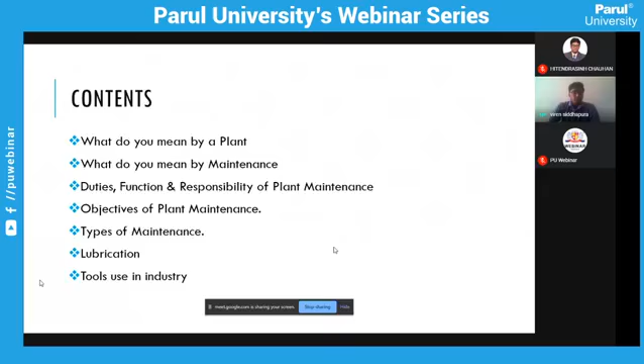So now we are going. What do you mean by plant? Plant is a place where men, material, money, equipment, machinery, etc. are brought together for manufacturing products.

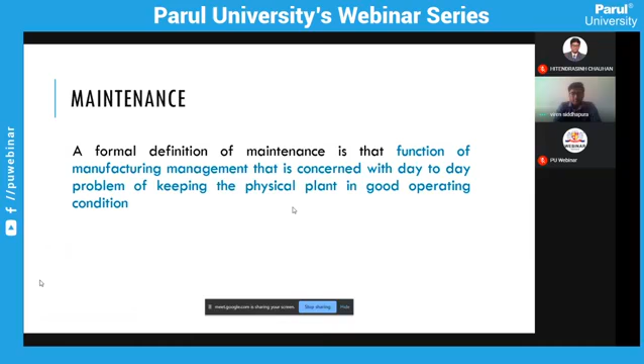Maintenance engineer works over time. The second topic is what is the duty, function, and responsibility of the plant maintenance department. First is inspection, inspection of every equipment.

Inspection of every equipment used in plant maintenance is required to maintain that equipment and engineering data regarding drawings of pumps, equipment, fans, blowers, and so on.

For example, we should require to overhaul that pump, so we should require to get parts of the pump to replace. This is called overhauling or gearbox overhaul of every equipment.

Then after housekeeping, after completion of any job, we will require to housekeep the surrounding area. And the last one is supervision of labor force, which is required to manage the labor forces as per our work environment.

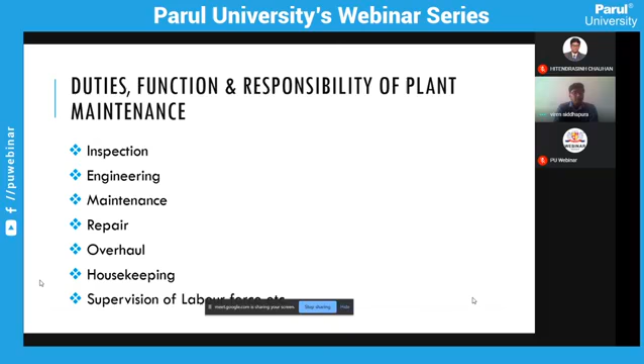So the third topic is the objective of plant maintenance: to achieve minimum breakdown and keep the plant in good working condition at the lowest possible cost. Our main objective is to minimize breakdown to achieve the lowest possible cost. If we achieve minimum breakdown, then by default we'll achieve a lower possible cost.

Second, machines and other facilities should be kept in such conditions which permit them to be used at optimum making capacity without any interruption.

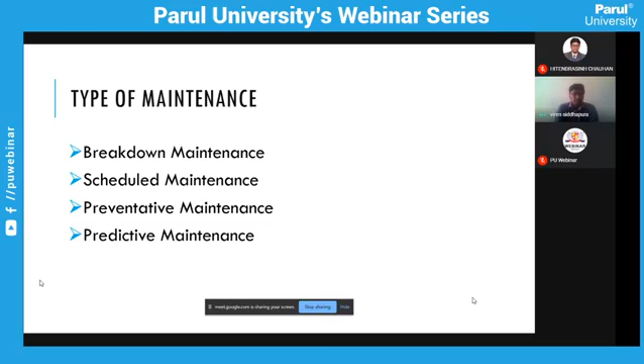Second is, what type of maintenance? There are four types of maintenance: breakdown maintenance, scheduled maintenance, preventive maintenance, and predictive maintenance. The first one is breakdown maintenance. Corrective or breakdown maintenance implies that repairs are made after the equipment is out of order and it cannot be performed in normal conditions.

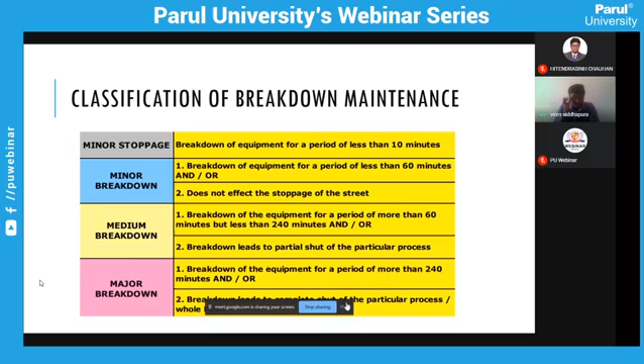Typical cause of the breakdown: failure to replace worn-out parts, lack of proper maintenance, external factors, and sudden changing process parameters. This condition also requires replacement of worn-out parts. और किसी वजह से कोई हमने मेंटेनेंस किया लास्ट टाइम और वो प्रॉपर नहीं हुआ है उसकी वजह से ब्रेकडाउन आ सकता है. सडन चेंजिंग प्रोसेस पैरामीटर - अगर कोई केमिकल प्लांट है और उसमें कोई प्रोसेस पैरामीटर को सडनली चेंज किया जाता है ग्रेजुअल चेंज करने के सिवाय तो इसकी वजह से भी ब्रेकडाउन आ सकता है.

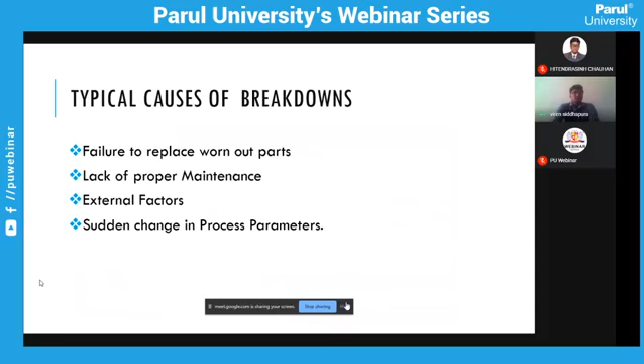Disadvantage of the breakdown maintenance: breakdown generally occurs at improper time. This leads to poor hurry maintenance and excessive delay in production. Second is faster plant deterioration, direct loss of profit and reduction in output. तो जब भी ब्रेकडाउन होता है तो ऑब्वियसली कंपनी में कुछ प्रोडक्शन लॉसेस होते हैं, उसकी वजह से हमें काफी डिसएडवांटेज है हमारे लिए।

Scheduled maintenance is a switch-in-time procedure aimed at avoiding the breakdown, which should be minimized. The scheduled inspections, repair, and overhauling is part.

For example, routine maintenance, running maintenance, opportunity maintenance, window maintenance, shutdown preventive maintenance. So preventive maintenance, routine preventive maintenance, which includes those maintenance activities that are repetitive and periodic in nature, such as cleaning or small adjustment of instrument.

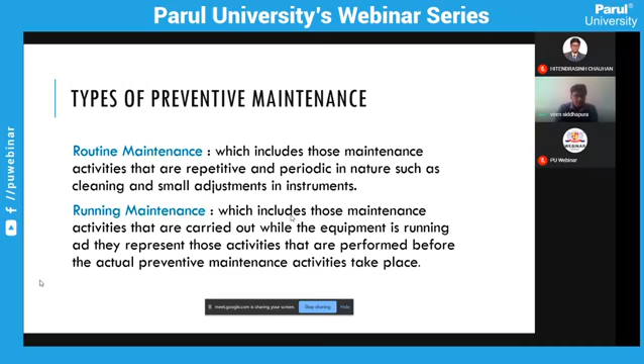Second is running maintenance, which represents those activities that are performed before the actual preventive maintenance actually takes place. Second is opportunity maintenance, which is a set of maintenance activities that are performed on instruments when an unplanned opportunity exists.

किसी भी इक्विपमेंट है, फॉर एग्जाम्पल कोई भी इक्विपमेंट है, उसे हम प्रिवेंटिव मेंटेनेंस में नहीं ले सकते और हमें किसी भी टाइम अपॉर्चुनिटी मिली मेंटेनेंस के लिए तो उसे ले लेते हैं, तो कहते हैं अपॉर्चुनिटी बेस्ड मेंटेनेंस। थर्ड वन इज विंडो मेंटेनेंस, which is a set of maintenance activities that are carried out when equipment is not required for a defined period of time.

The fifth one, shutdown preventive maintenance, which is a set of maintenance activities that are carried out when the total production line is stopped. फॉर एग्जाम्पल हम किसी भी शटडाउन लेते हैं एनुअल या क्वार्टर, तो उस टाइम जितने भी इक्विपमेंट है उसको मेंटेनेंस करते हैं तब जब पूरा प्लांट क्लोज होता है।

Objective of preventive maintenance: to minimize the possibility of unanticipated production interruption or major breakdown by locating or uncovering any condition which may lead to it. Maintain the optimum productivity efficiency of plant equipment and machinery. To maintain the operational accuracy of plant equipment, to reduce the work content of maintenance jobs, and to achieve the maximum.

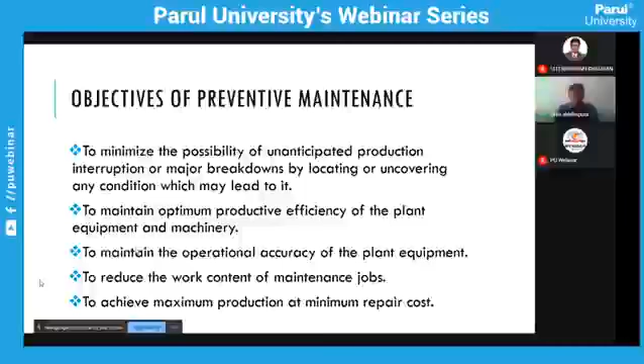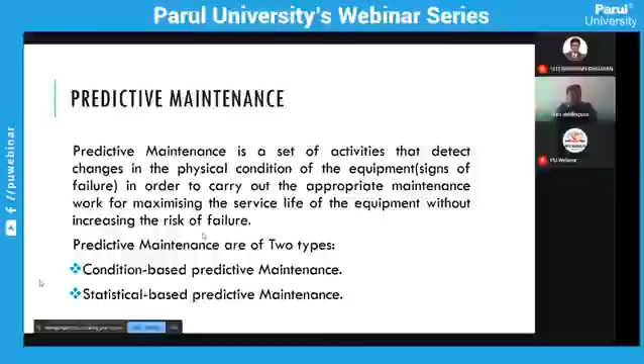and statistical based predictive maintenance. So the types of predictive maintenance are condition based and statistical based. The condition based depends on the continuous or periodical condition monitoring of equipment to detect a sign of failure. तो periodically हम इक्विपमेंट को मॉनिटर करते हैं और उसका साइन ऑफ फेलियर को आइडेंटिफाई करते हैं.

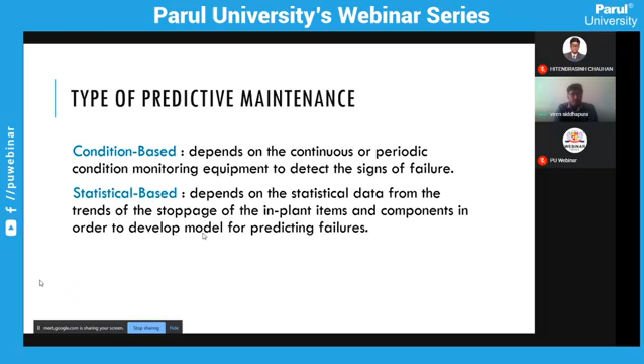Second, statistical based - depends on statistical data, meaning historical data, from the trend of the stoppage of plant items and components, in order to develop a model of predictive failure.

The drawback of predictive maintenance is that it depends heavily on information and correct interpretation of the information.

The main difference between preventive and predictive maintenance is that predictive maintenance uses the monitoring and conditioning of the equipment to predict the actual mean time to failure, whereas preventive maintenance is dependent upon the industrial average life statistics.

तो ये यहाँ पे मेंशन किया है कि प्रेडिक्टिव मेंटेनेंस को एज पर आवर नॉलेज विजडम हम मॉनिटरिंग करते हैं किसी भी इक्विपमेंट को, उसके हिसाब से हम डिसाइड करते हैं. और प्रिवेंटिव मेंटेनेंस को वो इंडस्ट्रियल एवरेज लाइफ स्टैटिस्टिक्स को डिसाइड किया जाता है.

तो बेसिक्स फॉर इवैल्यूएटिंग इक्विपमेंट परफॉर्मेंस. तो यहाँ पे कुछ नेम है. फॉर एग्जांपल मीन टाइम बिटवीन फेलियर MTBF तो इंडिकेट करता है रिलायबिलिटी ऑफ इक्विपमेंट. किसी भी इक्विपमेंट की रिलायबिलिटी क्या है इसे डिसाइड कर सकते हैं.

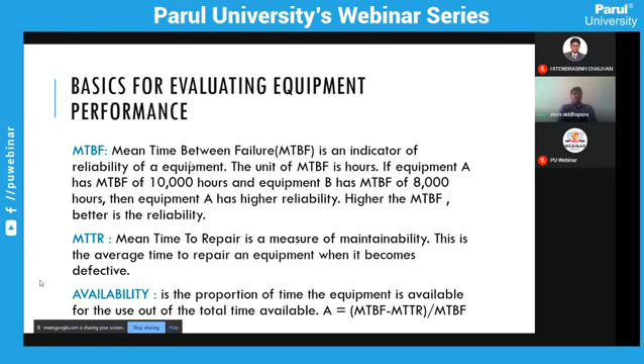सेकंड इज द कपलिंग एंड अलाइनमेंट। Align motor couplings utilizing a dial indicator or laser alignment procedure. Laser is preferred for speed and accuracy. Straight edge method is unacceptable.

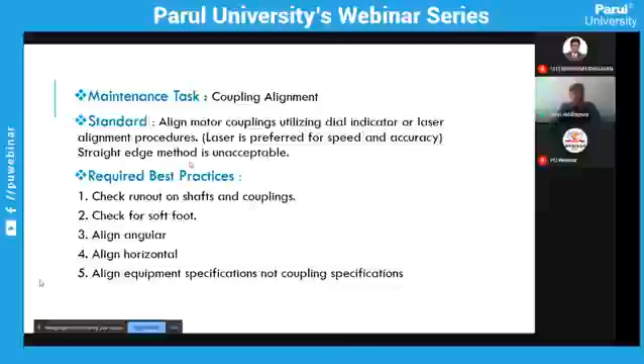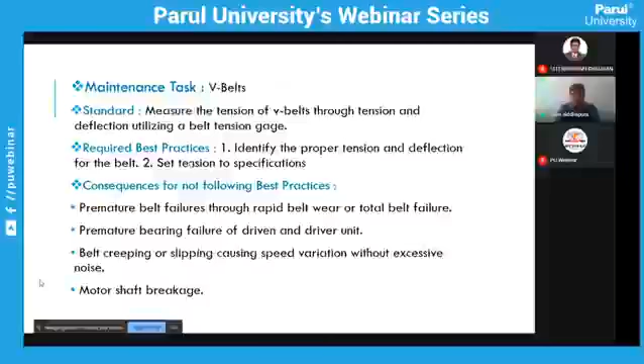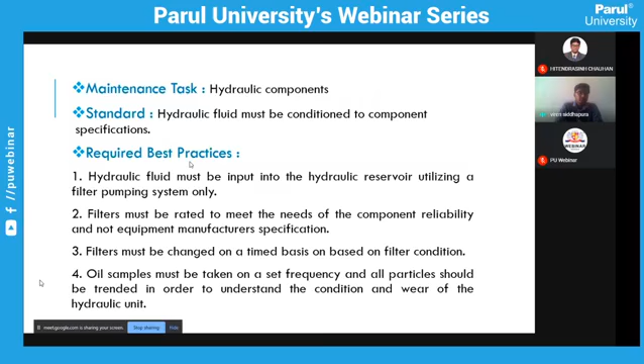So consequence for not following this practice: sticking hydraulic system जाम हो सकती है, premature or unknown hydraulic pump life, पंप की लाइफ भी रिड्यूस हो सकती है, sustaining hydraulic competency by maintenance personnel, length of equipment breakdown causes loss of production।

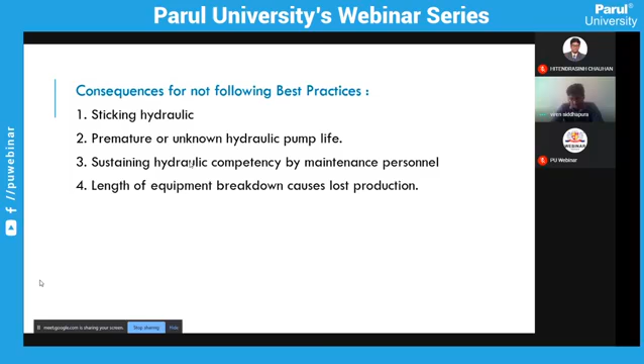तो lubrication एक इम्पोर्टेंट रोल करता है किसी भी कार में। तो देखिए इसको थोड़ा डिटेल में जाएंगे। लुब्रिकेंट से expected to reduce friction, cool the surface, spread of lubrication and lubrication practices.

The property of lubricant: first one is kinematic viscosity, second one is viscosity index, pour point of the lubricant, flash point of lubricant, total base number, TBN.

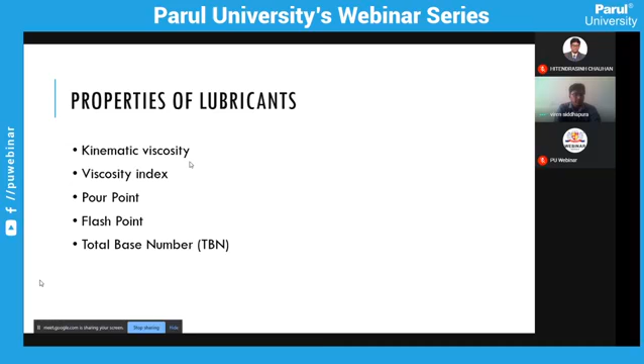So, kinematic viscosity - measure of internal resistance to flow, तो ability of flow इसे कहते हैं kinematic viscosity। Viscosity of fluid decays with increase of temperature। फॉर एग्जाम्पल टेम्परेचर बढ़ता है lubricant में तो उसकी विस्कोसिटी भी इफेक्ट होती है, वो रिड्यूस हो जाती है। Important in lubricant selection, increase in used oil indicates oxidation। Specified at 40 degree and 100 degree, measured in centistokes (CST)।

For kinematic viscosity recommendation - कोई फ्लूइड है यूज हो रहा है, फॉर एग्जाम्पल पंप के लिए, हाई, फॉर एग्जाम्पल कोई फ्लूइड है लुब्रिकेंट है, उसकी विस्कोसिटी लो है तो हाई स्पीड लो प्रेशर और लो टेम्परेचर एनवायरमेंट में वर्क कर सकते हैं। और हाई विस्कोसिटी है तो हाई प्रेशर हाई परफॉर्मेंस पर यूज हो सकते हैं। फॉर एग्जाम्पल हमें लो विस्कोसिटी वाला ऑयल यूज कर सकते हैं ताकि वहाँ पे स्पीड हाई होगी, प्रेशर लो होगा, टेम्परेचर भी लो होगा।

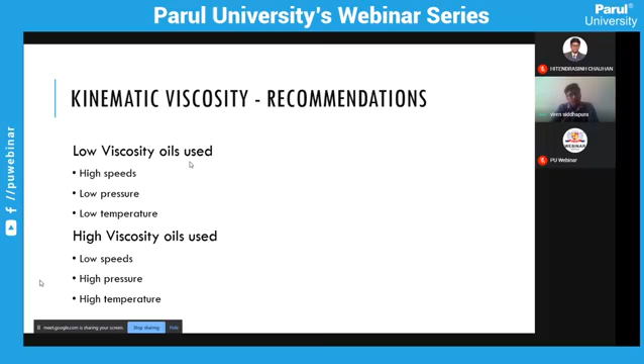Viscosity index is a measure of the fluid's change of viscosity with temperature. It's an empirical number - the higher the viscosity index, the lower will be the change of viscosity with temperature. It's an indicator of the temperature range of operations.

Pour point - what is a pour point? It is the lowest temperature at which the fluid will flow. At this temperature the fluid stops flowing, that is called the pour point. It indicates the lower operating temperature, and is measured in Celsius.

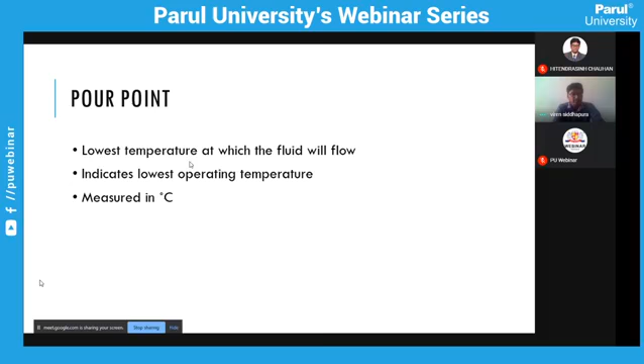Flash point is the lowest temperature at which vapor above the liquid will ignite under a flame. It indicates the safe maximum temperature of operation, and is an indicator of volatility, measured in Celsius.

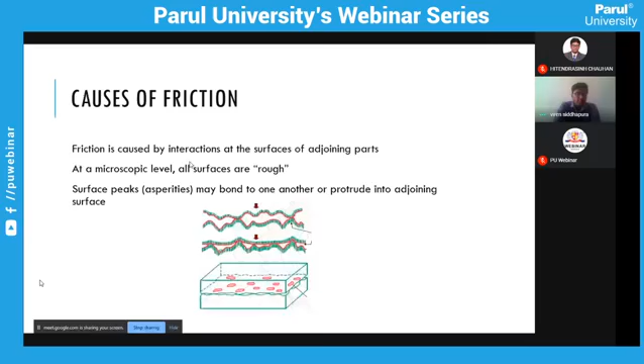The continuous full fluid film prevents metal to metal contact. The entire load is supported by hydrodynamic pressure created by the fluid. Viscosity of the fluid prevents the contact.

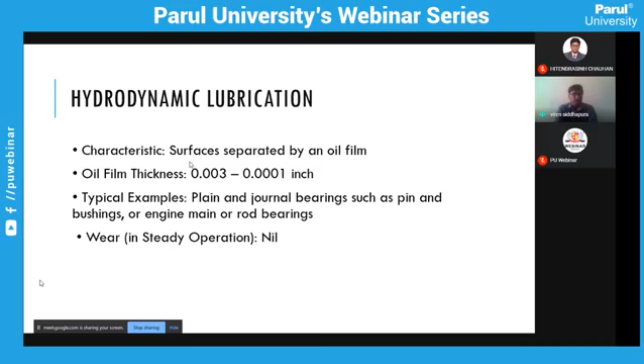Second is elasto-hydrodynamic lubrication. The pressure increase in the contact would increase the viscosity. Trapped oil in the contact zone behaves like a solid. Metal surfaces in the contact zone are elastically deformed. Friction from viscosity shearing raises the contact zone temperature. For example, rolling element bearing, gear, cam and follower, and traction devices.

So wear is high during the running-in active period, and can become moderate or too low depending on the lubricant and additive packages.

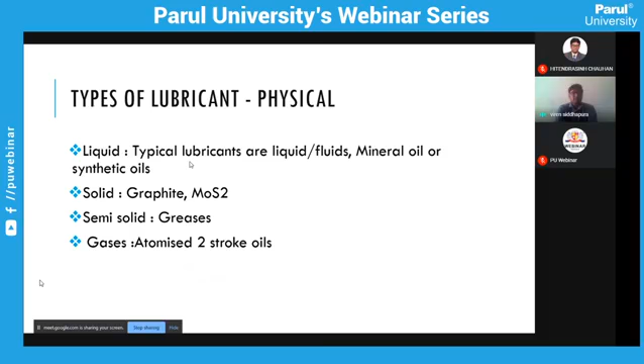Lubricant reduces the friction - the effect of friction like metal to metal contact is reduced, which leads to wear and tear, generates heat, and results in power losses. Lubricant reduces the friction by forming a film and reducing the effect of friction.

Lubricant - we can also use the lubricant for cooling. Here's an example in an engine: 33% is useful power, 33% is removed by cooling water, and 33% by lube oil or radiation.

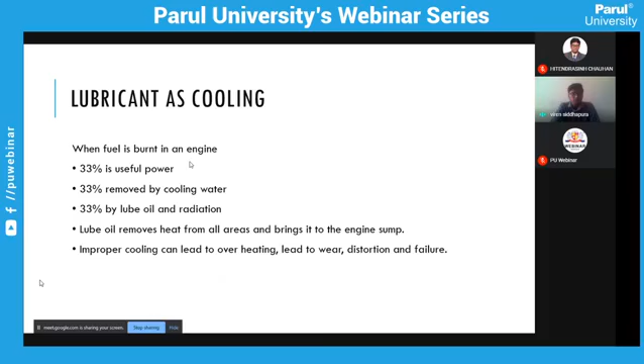The lube oil removes the heat from all areas and brings it to the engine sump. Improper cooling can lead to overheating, leading to wear, distortion, and failure.

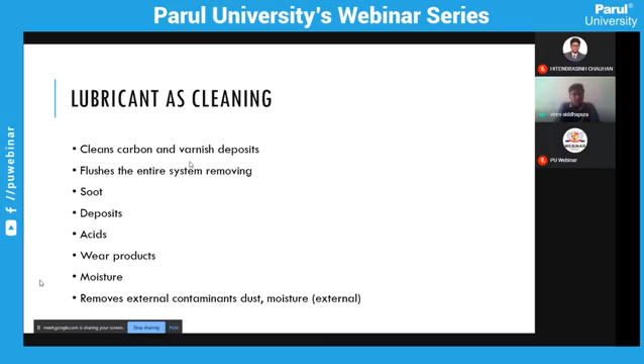Lubricant as a cleaner - for example, if a contaminant gets in, it goes out through the lubricant. It cleans carbon and varnish deposits, flushes the entire system removing deposits, acids, wear products, and moisture - it removes external contaminants like dust and moisture.

Lubricant as noise reduction - when lubrication is present, noise is by default reduced because it prevents metal to metal contact and reduces damping noise.

So here are some lubrication systems used in industry - SKF single line automatic lubricants.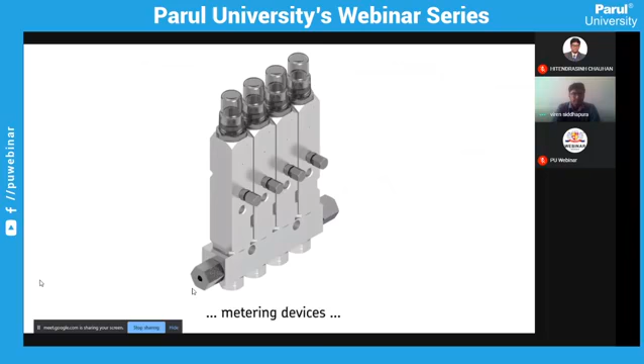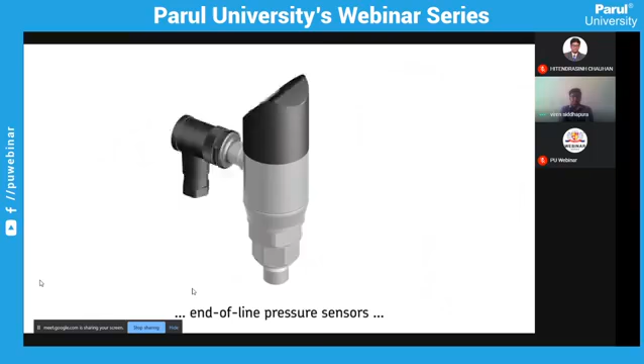Several single-line metering devices that include piston sensors similar to the SLV, a control unit similar to the LMC 301, pressure sensors like 234, 111453 or similar products, and tubing.

Lubrication zones are created by using solenoid valves. Each zone can be operated, controlled, and monitored separately by making use of multi-way valves. Subdivided lubrication systems are used in machines where different critical lubrication points need to be monitored. They can also be used to operate separate lubrications within one system.

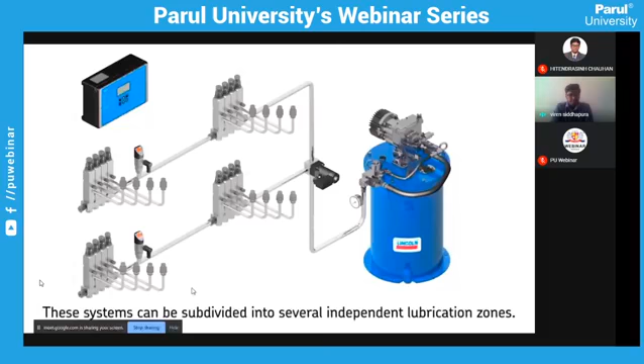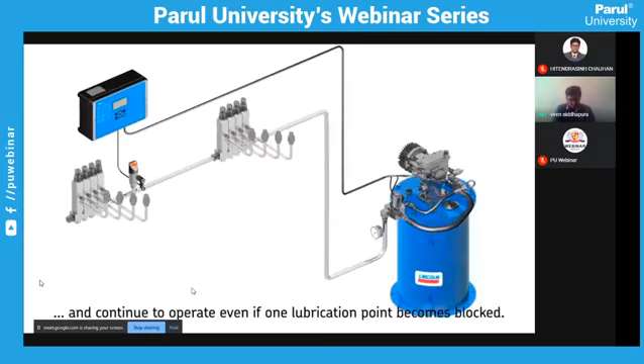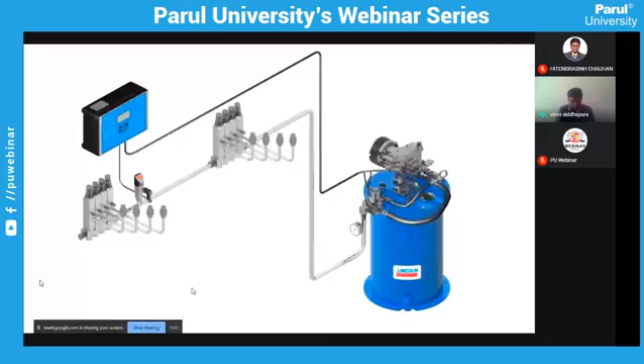These flexible systems are simple to design and can be reduced easily by removing metering devices or extended by installing additional metering devices. SKF single-line lubrication systems are able to pump long distances and work with a wide temperature range, minus 40 degrees C up to 70 degrees C, minus 40 degrees Fahrenheit up to 150 degrees Fahrenheit.

SKF features a complete offering of single-line systems from low-pressure oil and fluid grease to high-pressure grease. These systems range from very small, with one lubrication point and line lengths of 0.5 meters, 20 inches, to larger systems with up to 900 lubrication points and line lengths of about 100 meters.

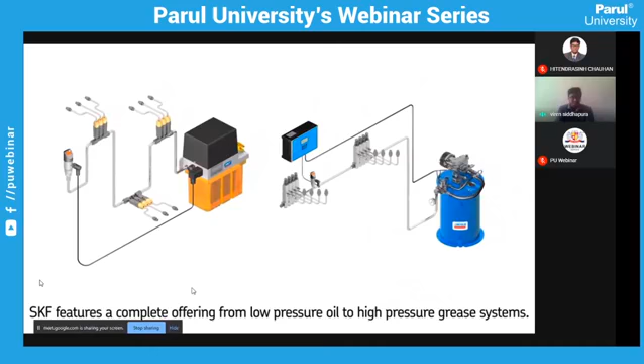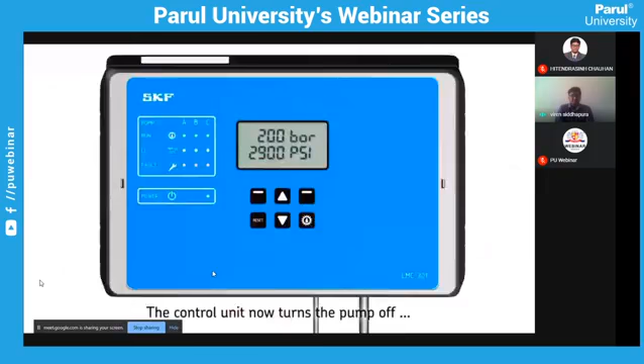Single-line pre-lubrication metering devices deliver the metered quantity of lubricant at the same time that pressure is built up in the main line. After the lubricant has been metered, the system is hydraulically closed, which causes the pressure in the main line to rise until the preset pressure at the pressure sensor is reached. This sensor is mounted in the main line after the last metering device. The pressure sensor then signals an electric pulse to the control unit, which turns the pump off. Now the relief valve relieves the main lubrication line pressure automatically. Afterwards, the cycle continues as before.

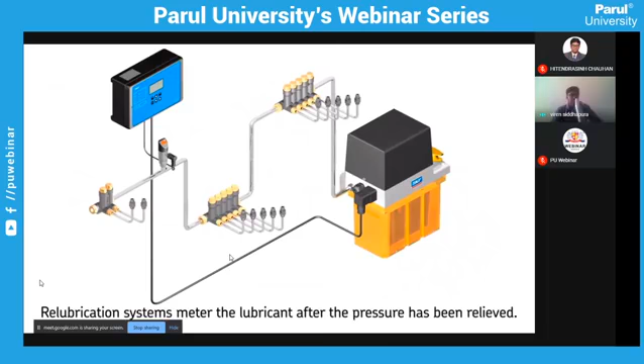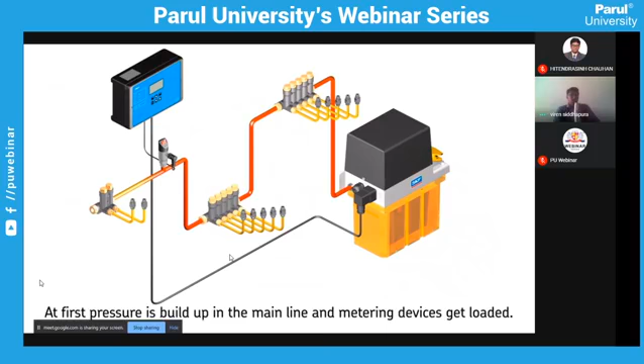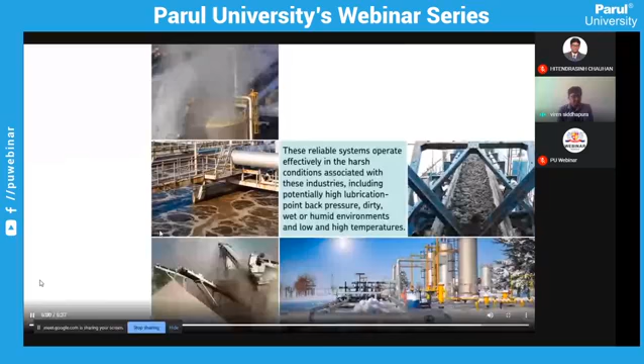Lubrication systems are suitable for a variety of applications: mining, on- and off-road and construction machinery, cement industry, renewable energy, food and beverage, machine tools, road, forestry, steel, oil and gas, and more. These reliable systems operate effectively in the harsh conditions associated with these industries, including potentially high lubrication point back pressure, dirty, wet or humid environments, and low and high temperatures.

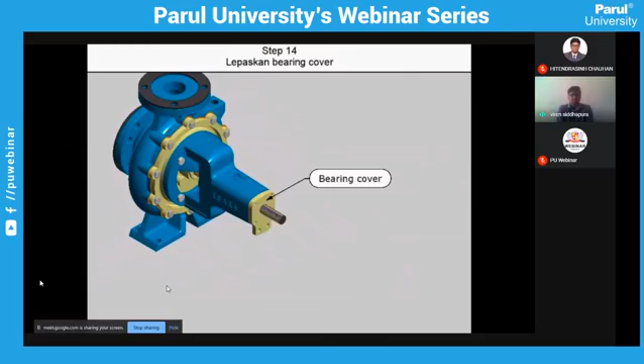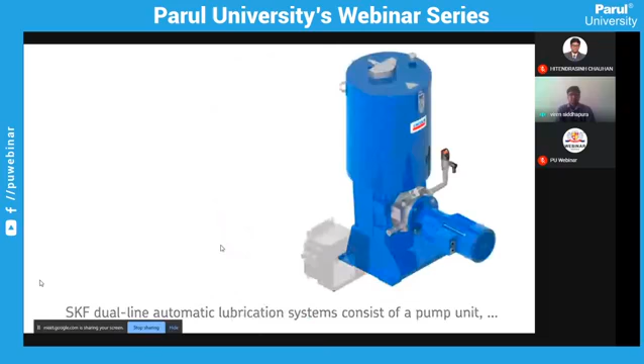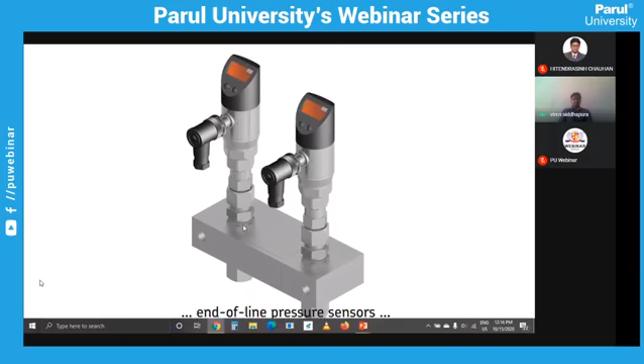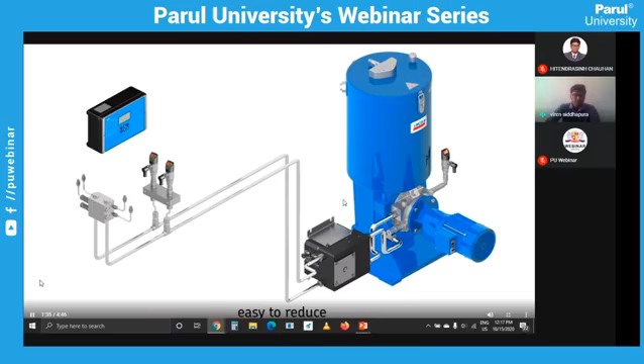Several dual-line metering devices that include piston sensors similar to the VSG, end-of-line pressure sensors like EDW or similar products, a control unit similar to the LMC 301, tubing and fittings. These flexible systems are simple to design and can be reduced easily by removing metering devices or extended by installing additional metering devices.

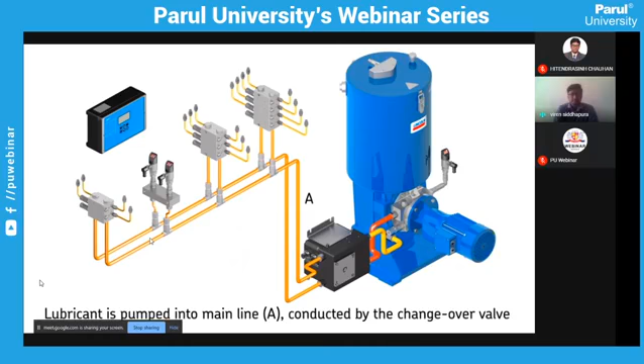The function principle of the dual-line system consists of two half cycles. In the first half cycle, the lubricant is pumped into main line A. The second main line, B, is connected to the relief line. The lubricant, which is conducted by the changeover valve, is supplied to the metering devices. The metering device pistons are moved into their adjusted end positions, thus dispensing an exact metered quantity of grease.

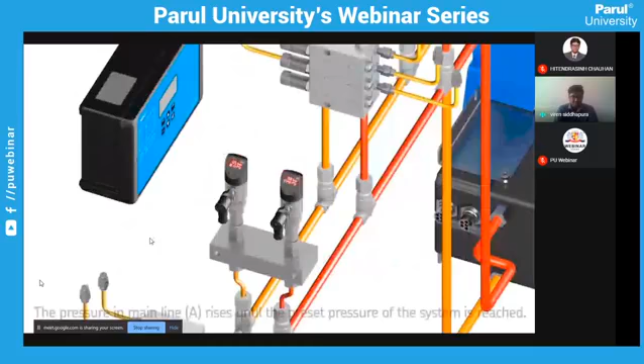Once all metering devices have dispensed their lubricant to the consumption point, the system is hydraulically closed, which causes the pressure in main line A to rise until the preset end-of-line pressure switch value is reached. This switch is mounted in the main line prior to the last metering device. The pressure switch then signals an electric pulse to the control unit, which turns the pump off and signals the changeover valve to relieve main lines A and B, and the pause time starts. At this stage, half of the lubrication points in the system have been lubricated.

System pressure relief works in such a way that the pressure line between the pump and changeover valve first gets relieved into one main line, then both main lines become relieved at the same time.

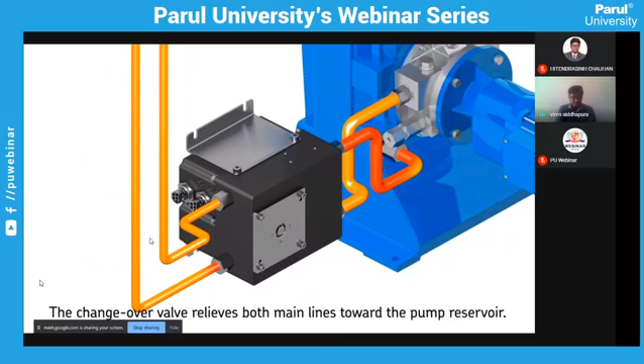This pressure rise causes the second half of the system lubrication points to get lubricated. Afterwards, the cycle continues as before.

SKF dual-line lubrication systems are suitable for a variety of applications, including heavy industry, metalworking plants, pulp and paper production, mining, mineral processing, power plants, cement factories, steelworks, and more.

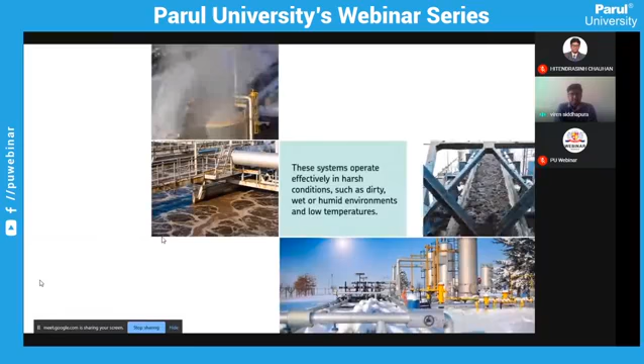Our reliable systems operate effectively in harsh conditions associated with these industries, including potentially high lubrication point back pressure, dirty, wet or humid environments, and low temperatures.

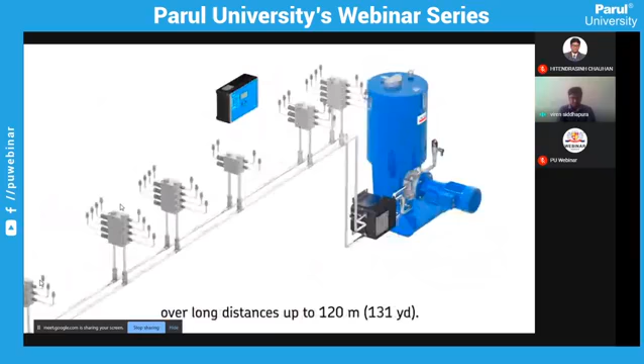SKF offers dual-line systems that can dispense a precise metered amount of lubricant to up to 2,000 lubrication points over long distances up to 120 meters, 131 yards, and more, depending on cable use.

The SKF dual-line system features smart electronic components which allow the system to learn and rely on...

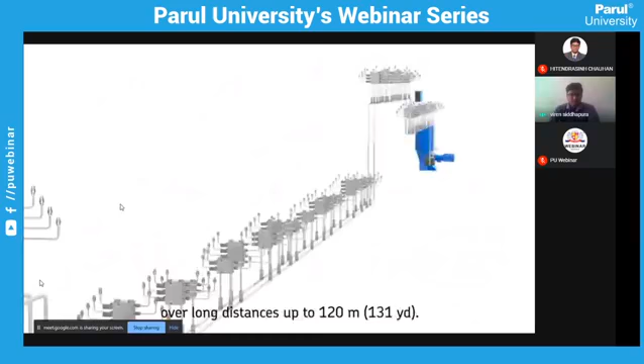There are majorly four types of spanners. The first one is plate spanner, second is a ring spanner, third one is a box spanner - we majorly use the ring spanner and plate spanner. The fourth one is an adjustable spanner, which can be adjusted as per requirement.

The second tool is the Allen key. The hex key, Allen wrench or Allen key is simple tool used to drive a screw with a hexagonal socket in its head. When required, this type of Allen key is used.

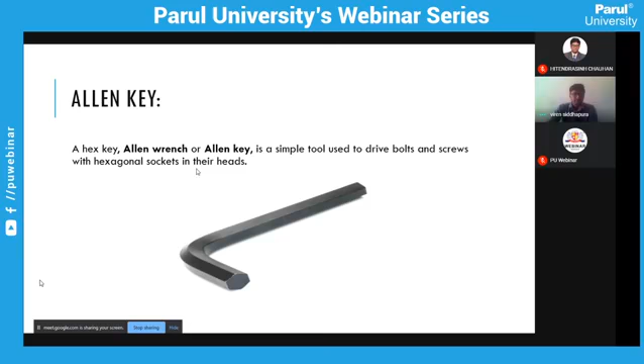The mallet is a kind of hammer, often made of rubber or sometimes wood, that is smaller than the maul or beetle and usually has a relatively large head.

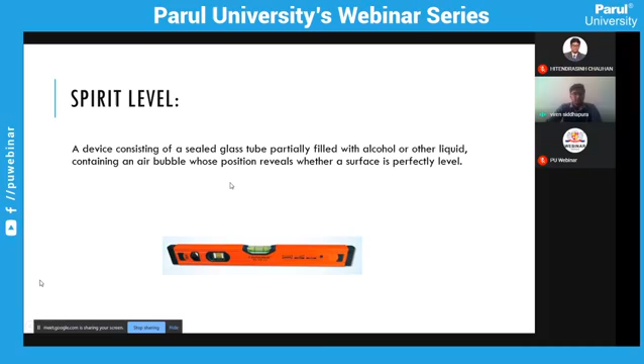The spirit level device consists of a sealed glass tube partially filled with alcohol or liquid, containing an air bubble whose position reveals whether a surface is perfectly level. So the spirit level identifies the surface level.

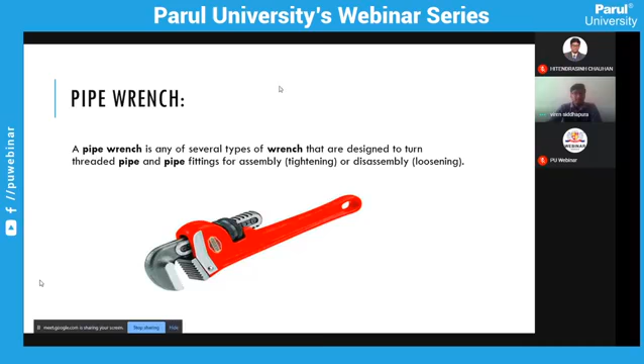The pipe wrench is a type of wrench designed to turn a threaded pipe or pipe fittings for assembly or disassembly of any pipe.